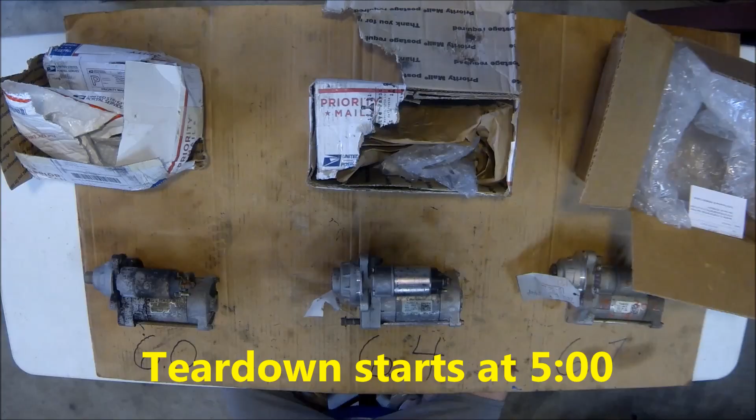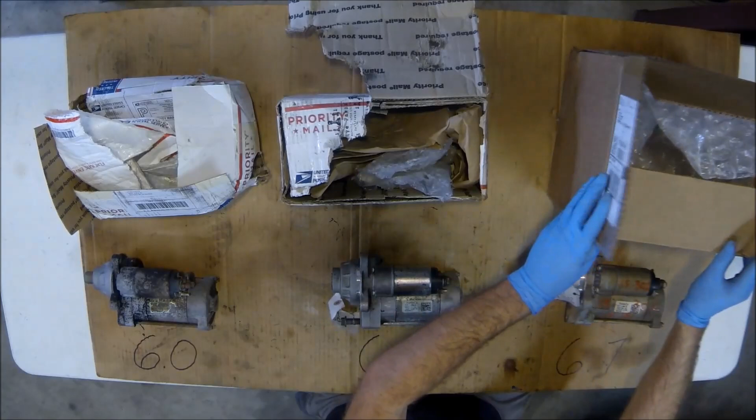So what we got here is three Ford starters: the 6 liter, 6.4, and 6.7, as denoted by the markings on my scrap piece of janky cardboard here. And a quick aside, here's a testament to the delivery systems. These two are USPS — this box was hanging on by a thread, this one wasn't much better but still structurally intact. This over here was UPS, and it looks almost brand new. So, you know, there's that.

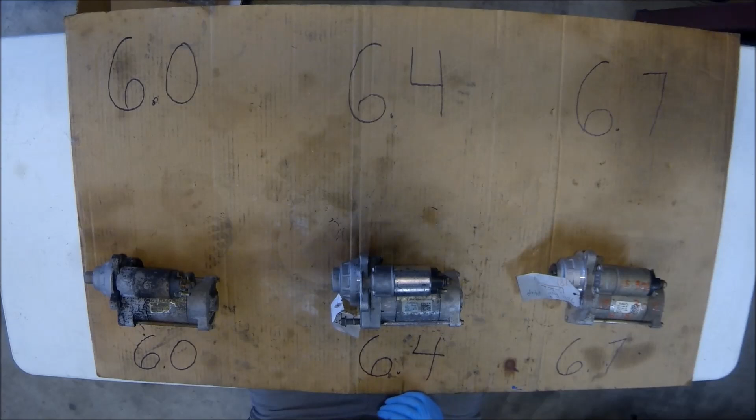If you go on the internet forums, you'll see a lot of people complain about the cranking RPMs of the 6 liter starter. So one of the popular swaps is to put a 6.4 starter on the 6 liter, and it cranks faster. After the 6.7s came out, it was discovered the 6.7 starters are backwards compatible as well. Even though they may look a little different as far as the nose cones go, the only thing you have to modify if you use the 2011, the 6.7 liter starter, is this threaded hole — it's smaller for a smaller bolt, while the 6.4 uses a larger bolt. So if you're going backwards, you need to put a bushing in to take up the extra room left over when a smaller bolt is used, which is required on the 6.7 liter starter. Anyway, the irony is I don't even own any of these engines.

I have a 7.3 liter engine, and I'm real particular about the way it cranks up. Try as I may, I've never been able to consistently find a starter that spins the engine in a way I'd consider healthy sounding. I've bought cheap starters, I don't know, this was 7-8 years ago, they were like $60 or $70 a piece. When brand new they'd spin the engine fast repeatedly, but they seemed to slow down quickly, if they held together at all. I think I went through 2 or 3 of them in a couple weeks because the quality was crap — it was solenoid issues mostly.

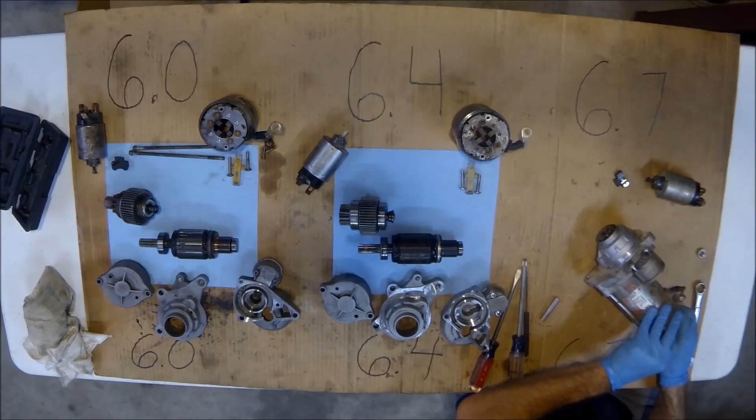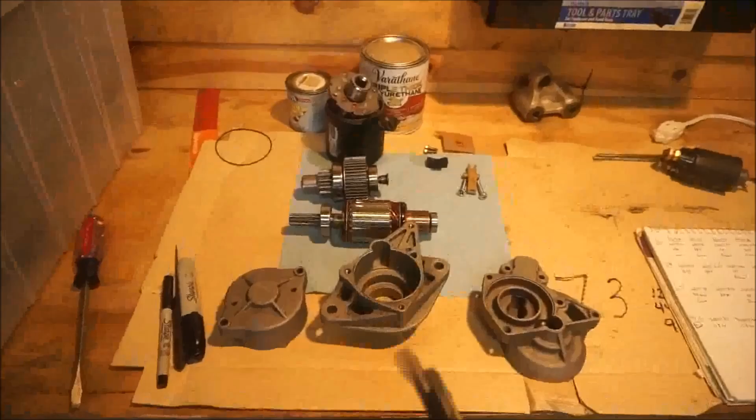Okay, so I've torn everything down, I've made all my inspections. I've got a 6 liter, 6.4, 6.7, and then over here we have a 7.3 starter. This starter is actually an AutoZone reman, so it's not like for like in the respect that these other 3 units are all OEM.

However, aside from that, I think we still can learn a lot from this comparison. So here's the findings. So this is a 6 liter starter.

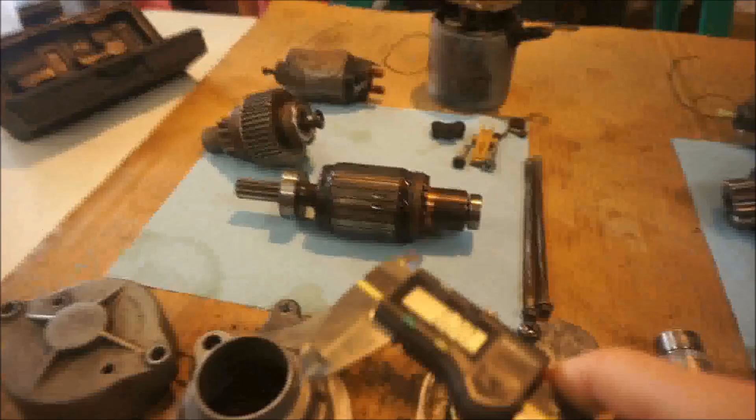Now the 2 obvious things that stand out to me are that the bearing that rides on the back of the starter drive, which is this bearing here that I'm pointing to, and it lives in this part of the housing, the bearing is the same size on the 6 liter and the 7.3. However, they are smaller than the corresponding bearings on the 6.4 and the 6.7 starter. So somewhere between the 6 liter and the 6.4 they decided to upgrade this, so the bearing is bigger.

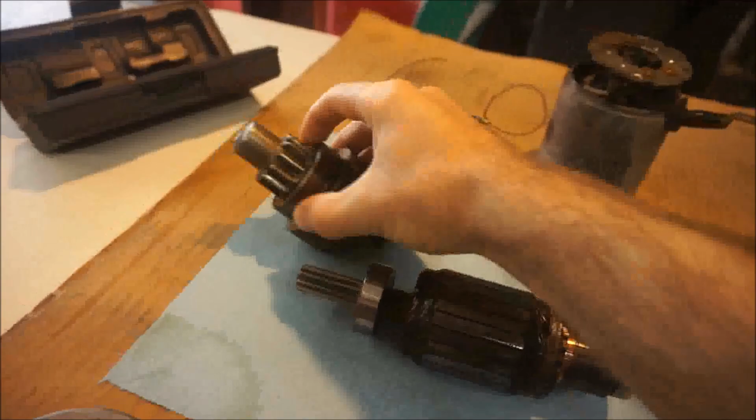The second difference is the starter drive itself. You can see the 6 liter starter drive has this little piece that sticks out past the gear, whereas the 6.4 and the 6.7 don't have that.

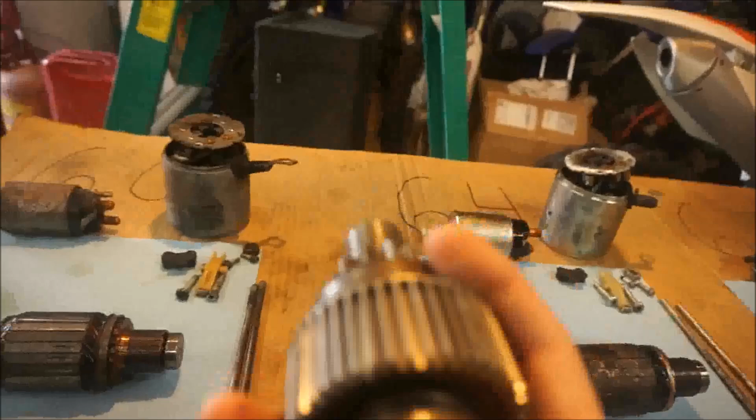Another difference is the way they actually operate. So this is the 7.3. If I push down here where the solenoid activates on the pinion here, when you push it up, as you can see, the tooth spins, or the teeth spin, but the shaft that they ride on is stationary. So when I push up, I'm basically only moving this portion outwards.

However, on the 6.4 and 6.7 starters, if I do the same thing, you can see the teeth move as well as the shaft. So functionally it's a different operation, but it performs the same function. So that's just a difference. It's not good or bad, it is what it is.

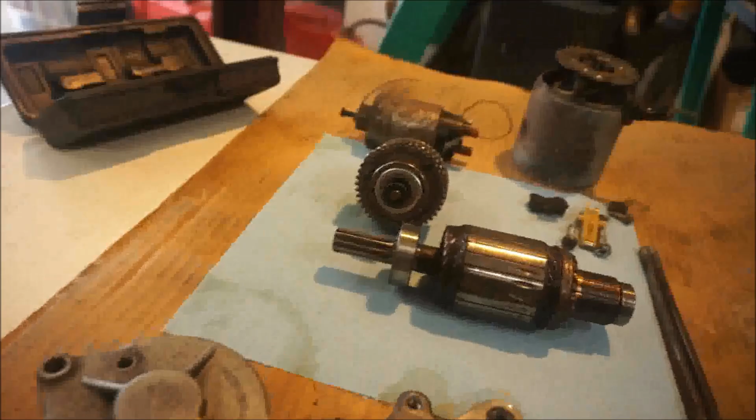Starter drive is different. This starter drive has a larger bearing here. Let's see, this bearing, which is for S&Gs, 40 millimeter OD. This one here, 47. It's a little bit bigger.

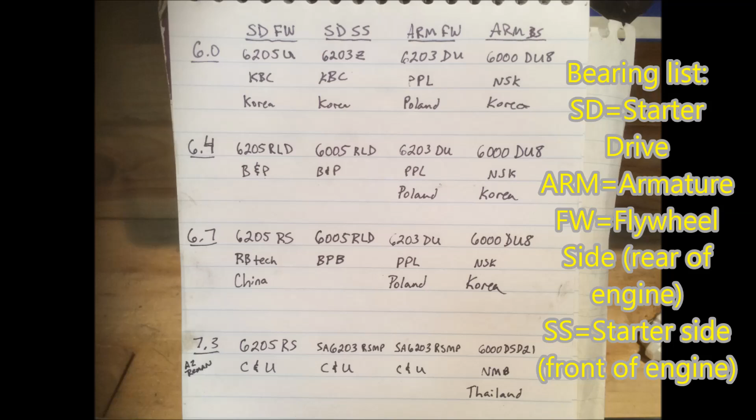Okay, now aside from that, other differences. The overall length of the armatures are the same amongst all the starters. However, the... I don't even know what you call them. In the case it would be called the field windings, but this portion here, the poles, I guess, for lack of a better term. Okay, these are roughly 47 millimeters, give or take, in length.

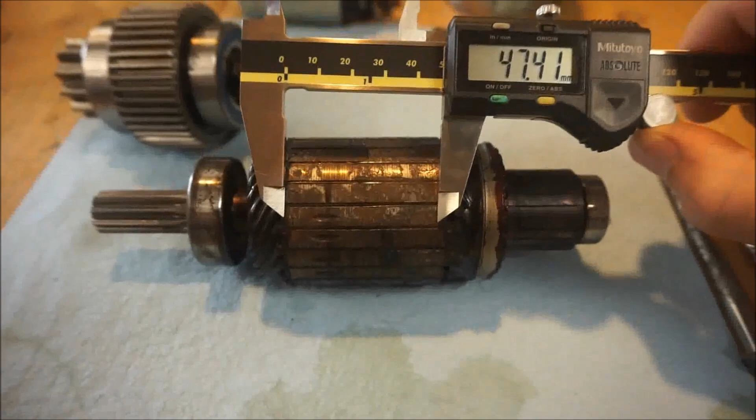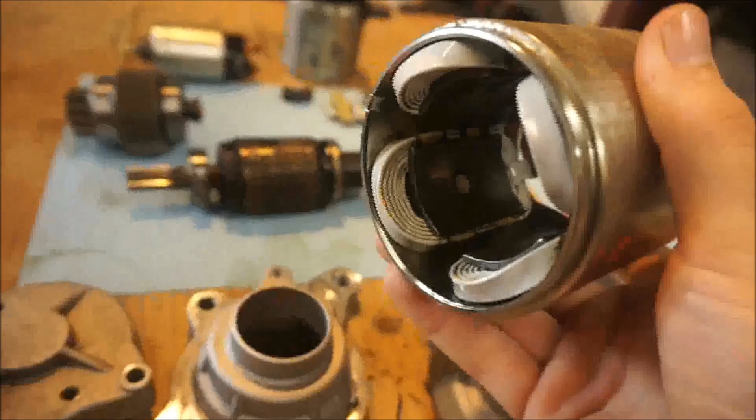On the 6.4, they're larger. And I'll show you on the 6.7 because it's cleaner, it's easier to see. So they are 50 millimeters compared to... you can see it's a pretty big difference. That's probably about 45. So they're 5 millimeters longer on the 6.4 and the 6.7, and the corresponding field windings, the poles, the magnets are larger too, to correspond with that increase in length.

So that is really the only difference, aside from little things like the solenoid of the 6.4 and the 6.7 have these little black plastic plugs of some sort. The solenoid on the 6.0 and the 7.3 do not have that.

So really the difference is the length of the field windings and this corresponding section on the armature. So any increase in power or cranking RPM or anything like that has to come from the bigger windings and armature that's on the 6.4 and the 6.7, because the gear reduction is the same across all of them. They all have 12 teeth on the drive here, 44 teeth here, and the corresponding teeth count on the armature itself is 9, so the gear reduction is the same across the board. The brushes are about the same size. There's the same number of poles on all of these armatures.

23 is the number, in case you're wondering.

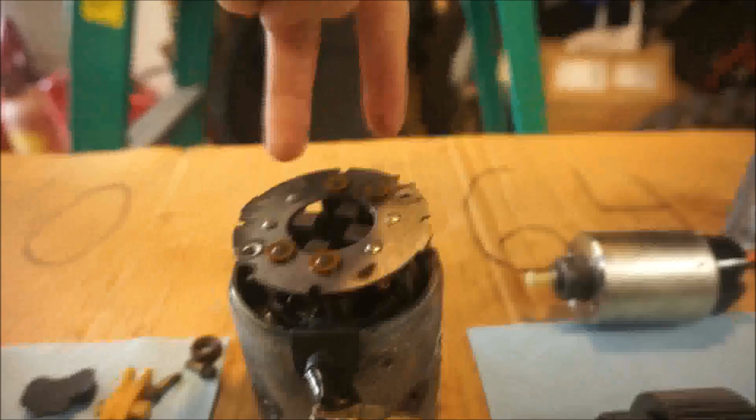The only other difference I saw is in the way this brush plate is attached. On the 6-liter starter, the brushes are attached to these two poles back here in the corner. So these two poles are where the brush is attached.

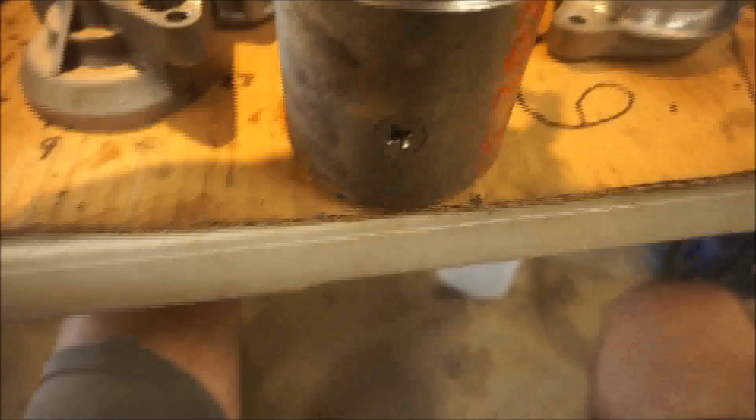It's different on the 6.4 and the 6.7. The brushes attach differently, the wiring looks completely different, and these are all series wound DC motors, because you get greater torque at 0 RPM with that style, so it's ideal for a starting motor. But if you can tell, these things are wired up differently.

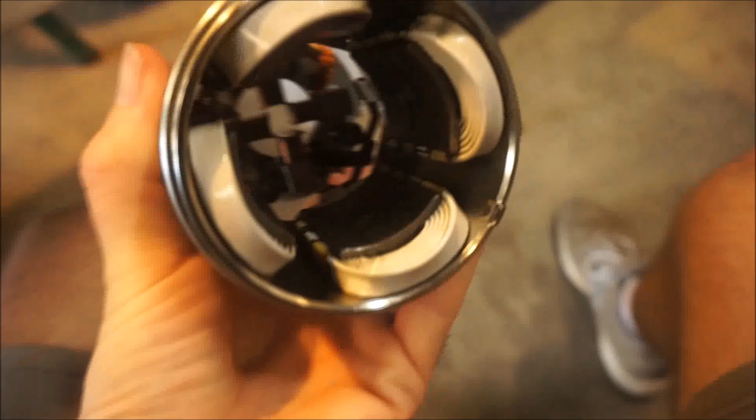I'm not sure how to describe the differences. Disclaimer, I ain't no electrologist, so I'm just kind of making some guesses here.

On the 6-liter, the field windings are connected at the bottom. There's two connections at the bottom, one there. So they're wired up differently. Now, I don't know if that matters. I think functionally, you know, on this one there are no connections at the bottom. Everything's connected up top.

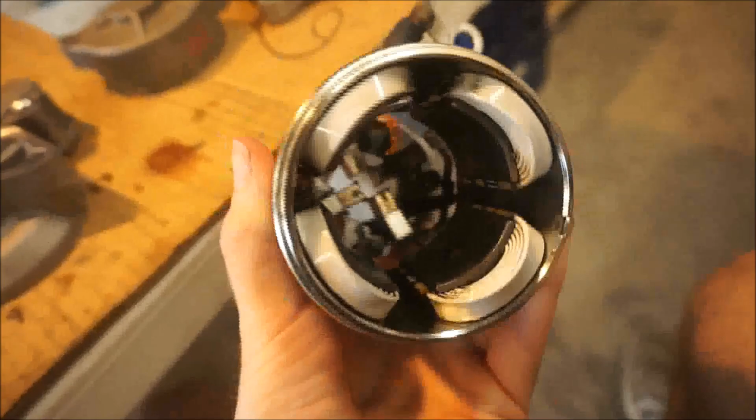So there is a difference. Now, whether or not that makes a hill of beans, I doubt it. It's probably just different ways to skin the same cat, if you will. There's the 7.3 — it's just like the 6-liter.

Okay, hopefully you can see this. So here's what we're dealing with. Up here we have the 6.4 and 6.7 liter starter. Down here we have the 6-liter and the 7.3 starter. And if you'll notice, they're wound differently.

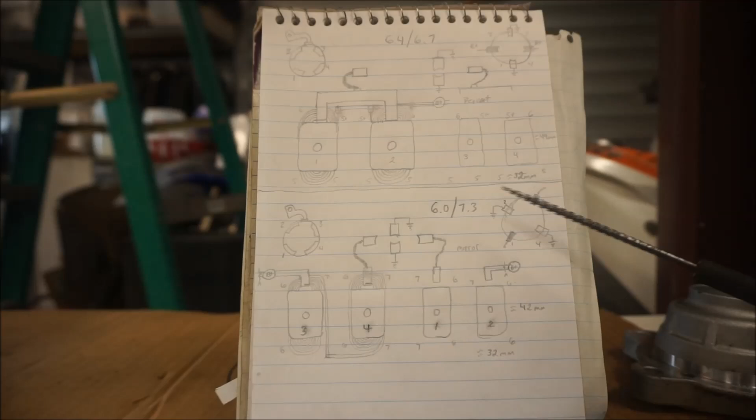Now, I alluded to this earlier. So let's go over the 6-liter first. These are your 4 brushes here, and 2 of the brushes go to ground. The other 2 have battery voltage, but since these are series wound motors, what happens is that the battery voltage...

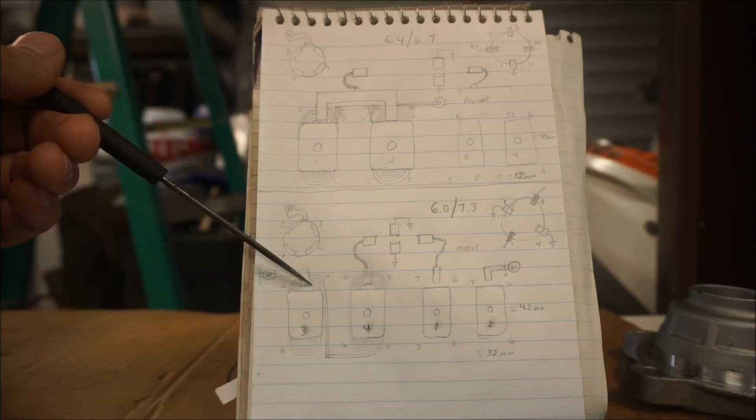first comes in through this post. This is the battery connection here, also shown there. So the voltage comes in, and there's a copper bus bar here, and it connects to the innermost wrap of these wire wraps that go around this. This is the electromagnet that's only magnetized when current is flowing through these wires.

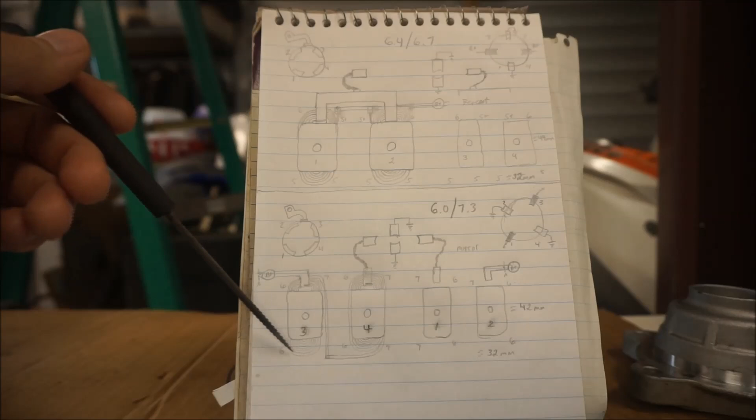These wires come in and wrap around, and they wrap around 6 times, and then at the end of their wrap they come down here, catch this wire, and come up here and wrap around this magnet 6 times, and then once they're done wrapping around this magnet, they come up and energize the brush here. And so that's 2 of these — that's 3 and 4.

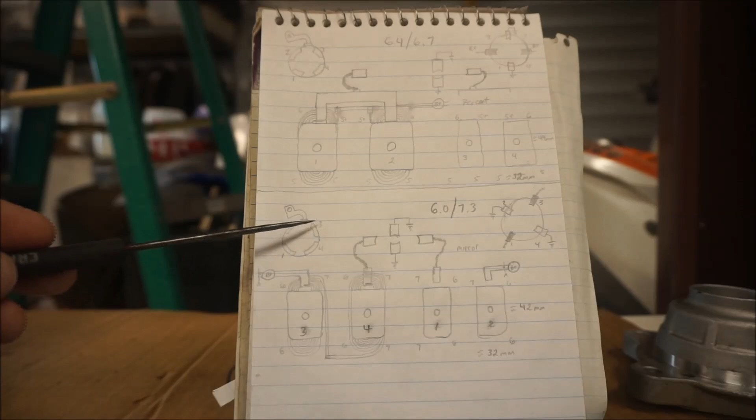So this is the top view of the starter. This is the battery connection here. It comes in — you got pole number 3, 4, 1, and 2. So these are 3, 4, 1, and 2. So that's one half of the equation.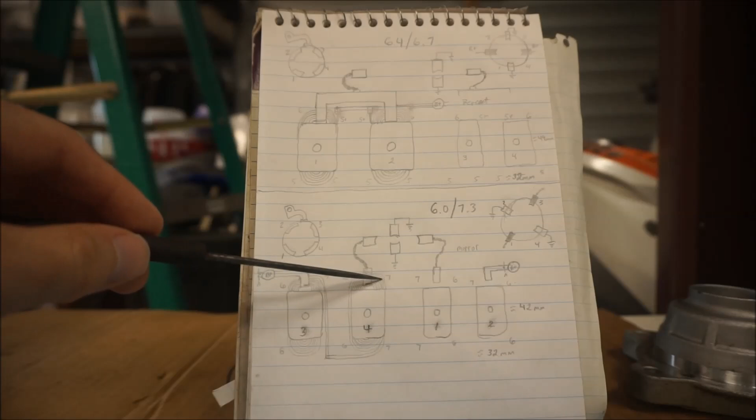The other half over here is actually mirrored. So you would take this on the left side and mirror it like that, so everything's in reverse. So where you've got technically 7 wires here, because there's an extra wire that wraps around and goes down, that's flip-flopped, and so there's more wraps on this side.

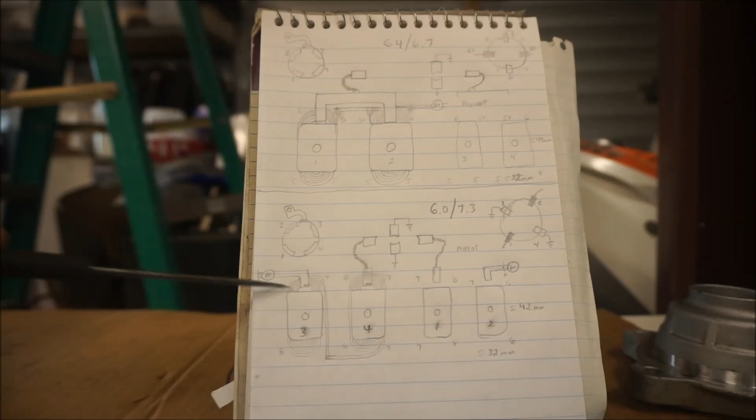So the wrappings would come here, and then they would go underneath and catch this pole over here and wrap around some more, and then this is the bus bar that goes back to the battery. So this is all connected right here.

So if you look up at the 6.4 and the 6.7 liter starter, you get the brush here, you get the 2 ground brushes, and then you've got your battery positive post here, and that comes across. There's a copper bus bar as well. It comes behind here and stops. And both of these poles are wound in the same way, and they're both parallel to this bus bar.

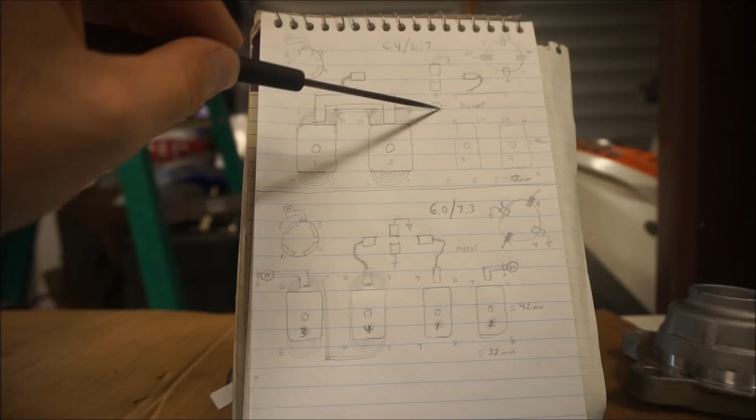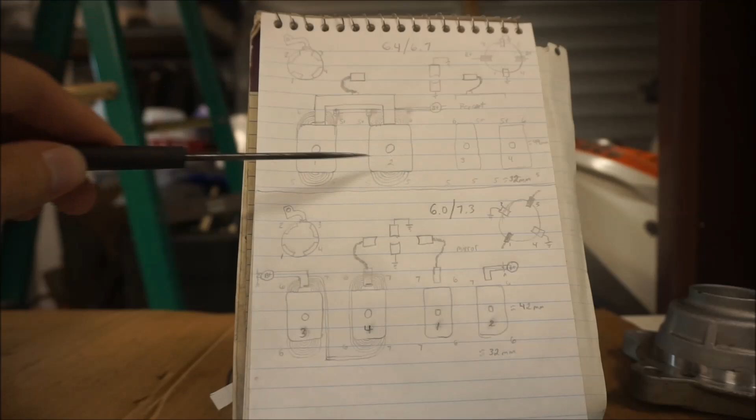So when this bus bar is energized, battery voltage goes to this series of windings and this series of windings at the same time. And they are wound 5 times versus the 6 times down in the 6-liter and 7.3 starter.

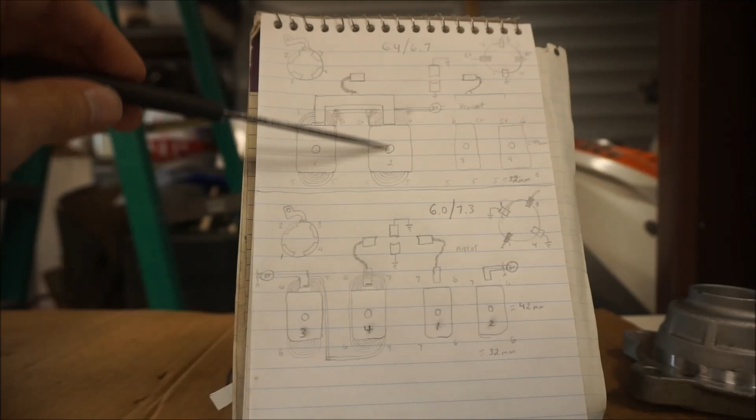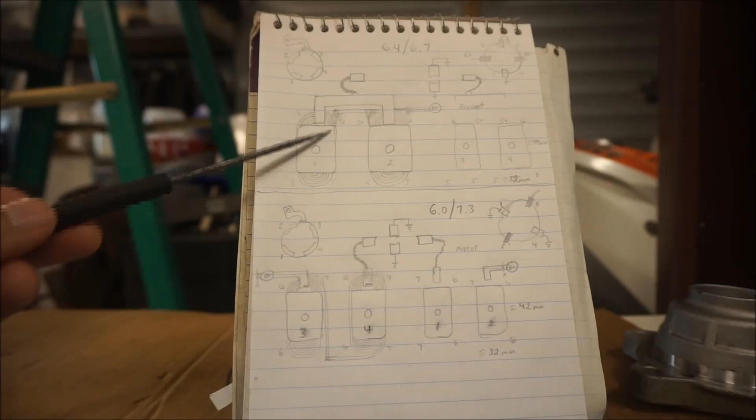But these poles are bigger. These poles are 49 millimeters top to bottom, whereas the 6 liter and the 7.3 are 42 millimeters. So these poles are bigger. Even though there's less wraps of wire around them, they're bigger poles, so I didn't do the measurements - I don't know which one technically has more wire, lengthwise speaking. But over here, that serves pole 1 and 2. If you come to the other side, pole 3 and 4 are repeats of this - they're not mirrored, they just repeat.

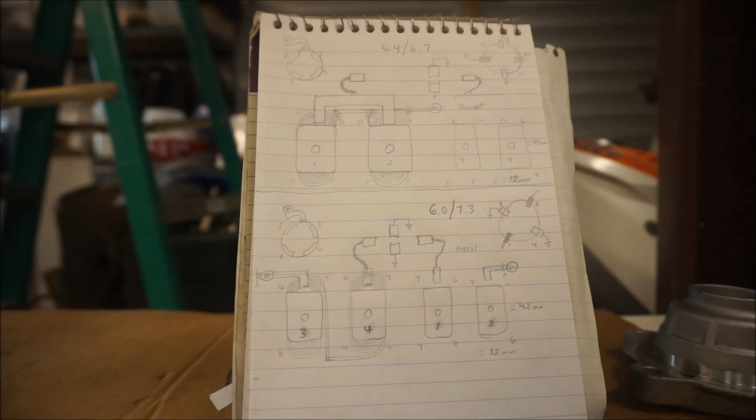So my theory as to why the 6.4 and 6.7 liter starters spin over much quicker is for a few different reasons. One, the poles themselves are bigger, as well as the windings on the armature.

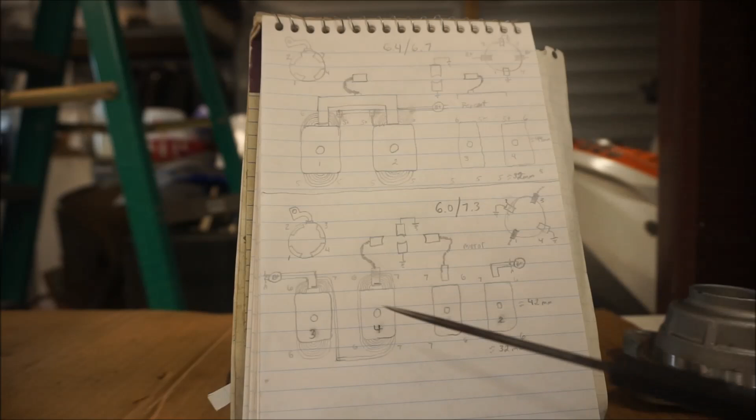Which would be these right here - they're bigger to compensate for the bigger poles. But aside from that, the fact that they're wound differently, the electricity has to come in here and go all the way around this pole, then it goes to this pole, wraps all the way around again, and finally it goes to the brushes.

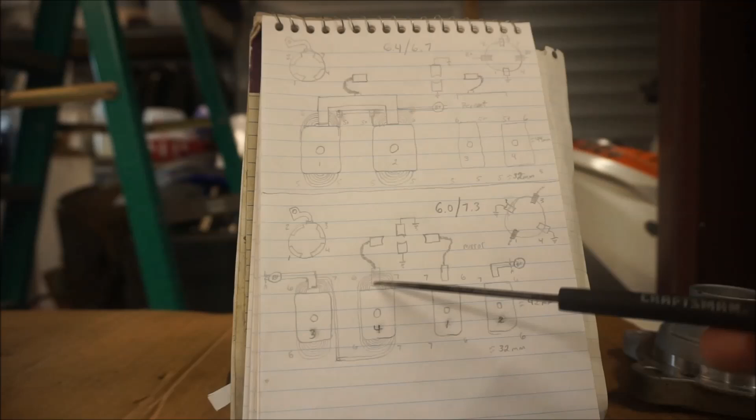Now, we're speaking only in milliseconds, but it does take longer for that energy to come in and make all these wraps, then come to the next one and make all these wraps before it gets to the brush. Whereas in the 6.4 and 6.7 liter starter, it comes in the bus bar, hits these wraps, and it's wrapping around here at the same time it's wrapping around here, then shoots up the middle, connects to this bus bar, goes to this brush. So it's going to be quicker. In my opinion, that's why the motor spins faster.

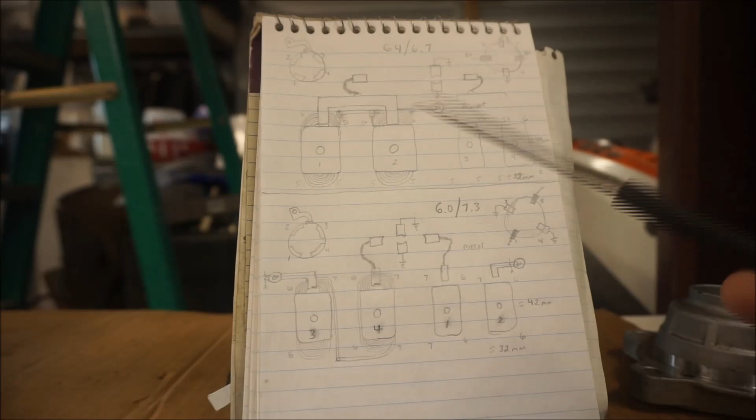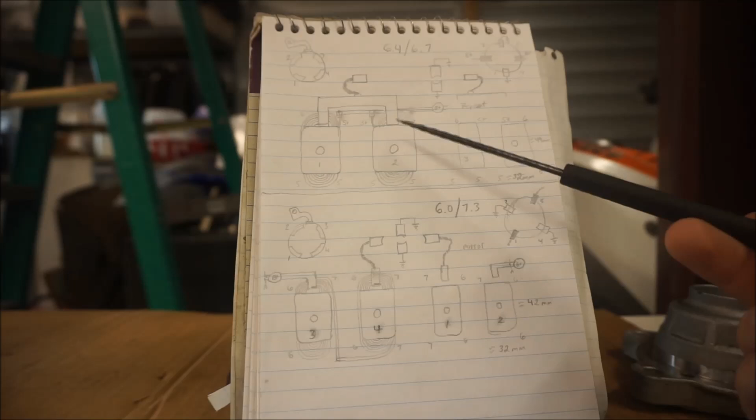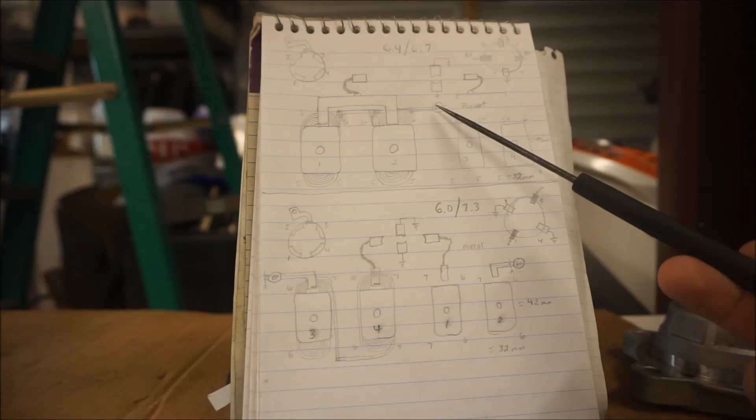I don't know what you'd call the difference between these two, because they're both series wound, but it's almost like this is a series wound motor, yet the poles are wired in parallel, if you will. Whereas on this one, it's like a series motor because it's in series - it goes from here to here to here. Whereas up here, it just goes here, these at the same time wired in parallel, then up to this brush. So that's a little different, and the locations of these poles in the motors too. I've got them numbered the same, but as you can see, their locations are wired differently.

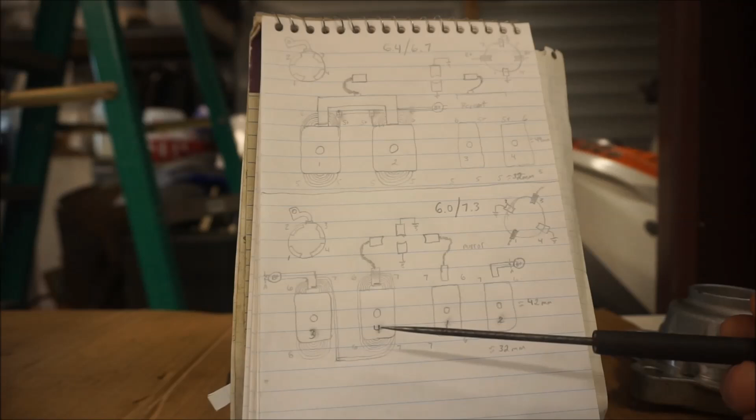Yeah, so that's about as deep as I can go on these starters, and certainly deeper than I've ever seen anybody else go or seen a video of. This is something I've wanted to know for a long time. Now I know. There's been a lot of speculation on forums as to what the differences really are, and people make a lot of guesses, but they don't really know.

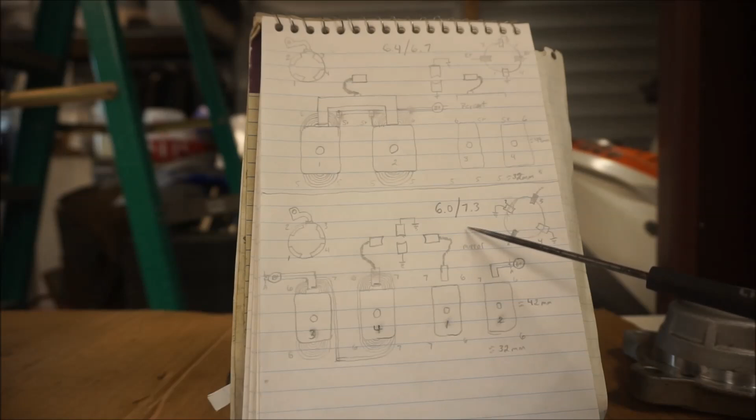There's even one forum where someone at a parts store printed out the data sheet that comes with these starters - I guess from other suppliers, you don't really get them from Ford. On the data sheet, I'm not looking at it now so I can't remember exactly what it said, but I think it said something like the 6 liter and 7.3 starters actually were more powerful but spun slower. I'd take that with a grain of salt, because those data sheets oftentimes are just the exact same data, just printed out and thrown in a box to make it look official.

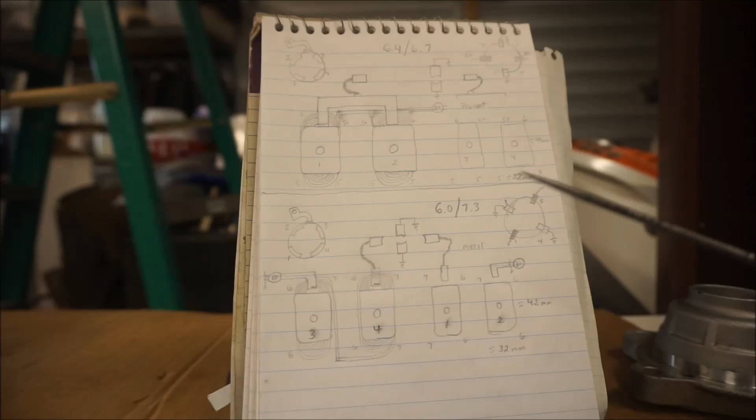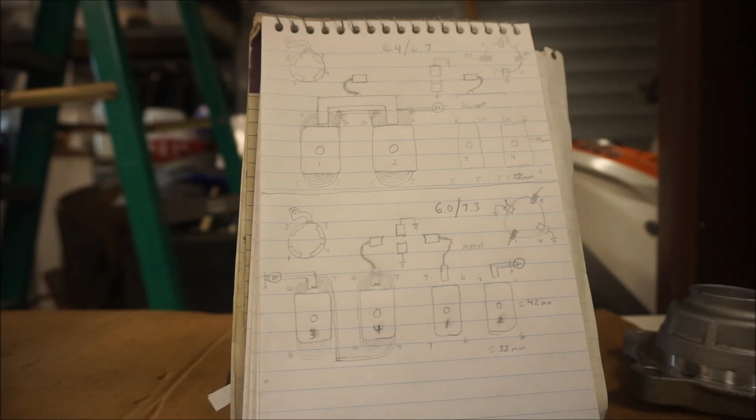And B, they may not have used - it may have been 2 different companies doing the testing. They may have used different methods of testing, because when you test a series wound motor, it needs to be tested against a load, and I don't know, there's a lot more to it than I even understand. But those data sheets, whatever - the proof is in the pudding, as I've stated earlier, and clearly the 6.4 and 6.7 starters are more powerful and spin the motor over much, much faster.

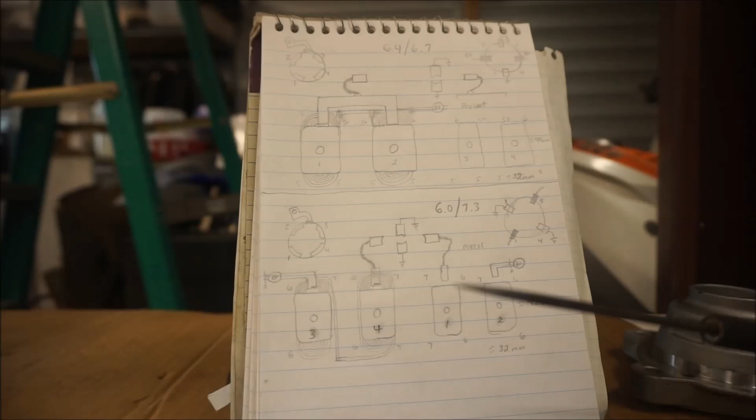So there you have it. Gear reductions are the same - it's just the motor itself that's more powerful. There's where your extra RPM comes from.

Okay, just for clarity, now I misspoke in the video a lot, and I don't feel like reshooting it, so I just want to say this: these are field coils.

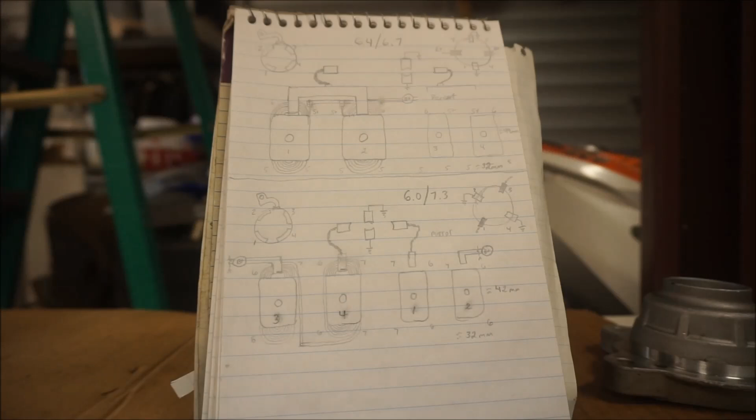So anytime I say poles, I'm really talking about the field coils. And poles may be an appropriate term as well, I don't know. As I said, I'm no rocket surgeon, don't have a degree in electrology, but I get by. The width of the field coils are identical at 32 millimeters.

Only the lengths are different, that is all. The only other thing I didn't check was the actual wire size of the windings between the 6 liter and the 6.4. They're potted, so it's really hard to get a measurement. Let's see what I can get here.

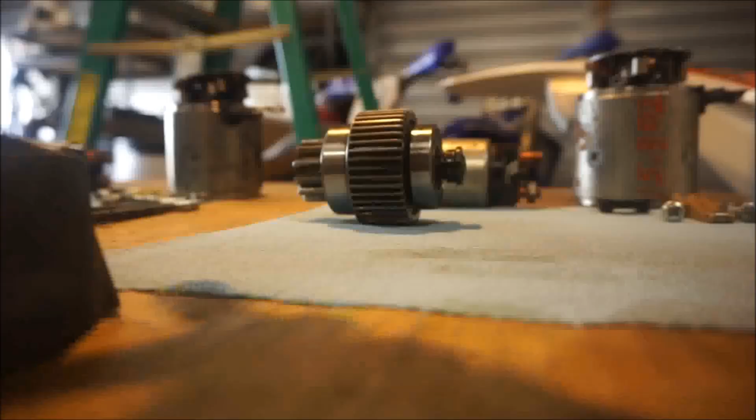Two and a half, roughly. I'm going to say 3 millimeters for the 6.7. Yeah, 3 millimeters for the 6.4. The 6 liter is really hard to measure. I'm going to say 3 for the 6 liter too. So it looks like all the winding, the wire size, and the armatures are all the same.

Yeah, they're all the same, so that's no difference. So there you have it: the definitive difference amongst all the Ford starters.

For the diesel, anyways. So just to wrap things up, the only performance increase that people are seeing when they install a 6.4 or 6.7 starter on their 6.0 is one of two things. Either it's due to the bigger armature and field windings, which I would presume that it is. I would assume, well, it stands to reason that that would be a more powerful motor. There would be more electricity flowing, generating a larger magnetic field, so more flux, and it would just have more power.

Aside from that, the only other reason they're getting more cranking RPM and a better performing starter is just the fact that it's a newer starter that they're putting on an older engine, newer than the starter that they're replacing. Aside from that, there's no difference.

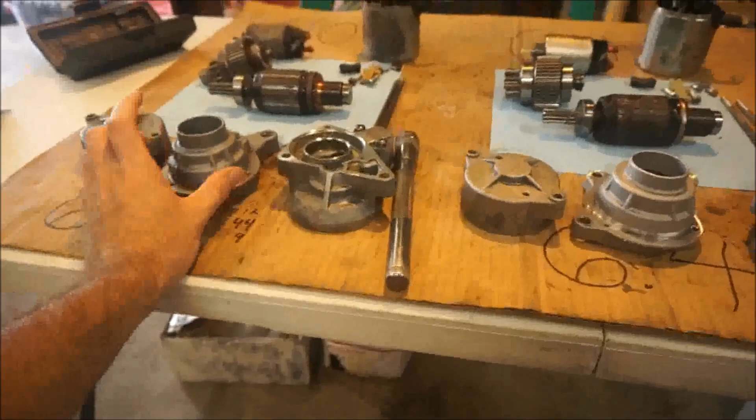Everything's the same. Now, one more thing that I do want to mention, that it's pretty cool, is that aside from the nose cone that actually bolts up to your engine, so it would bolt to the flywheel housing, aside from this, all the other parts are interchangeable.

Now you'd want to keep the armature with the proper field windings, yeah, that you need to keep the same, but aside from that, well, and you'd have to keep in mind the different sizes of the bearings between the 6 liter here and the 6.4 here. But aside from that, take all that into consideration.

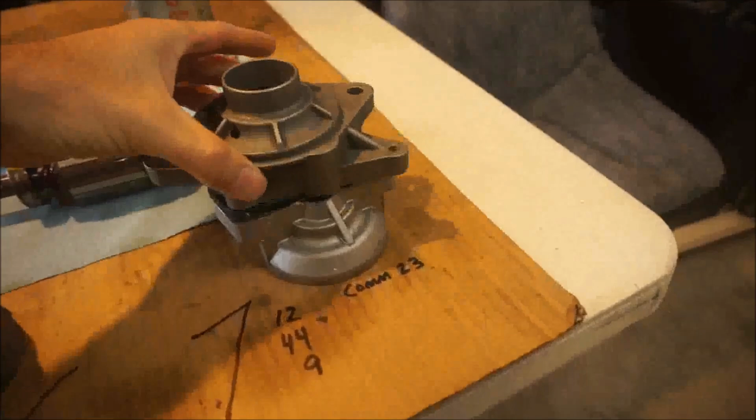So you can take a 6.7 liter starter, remove the very end of the nose cone, take your 7.3 nose cone, boom. 6.7 liter starter mounted to a 7.3 liter engine.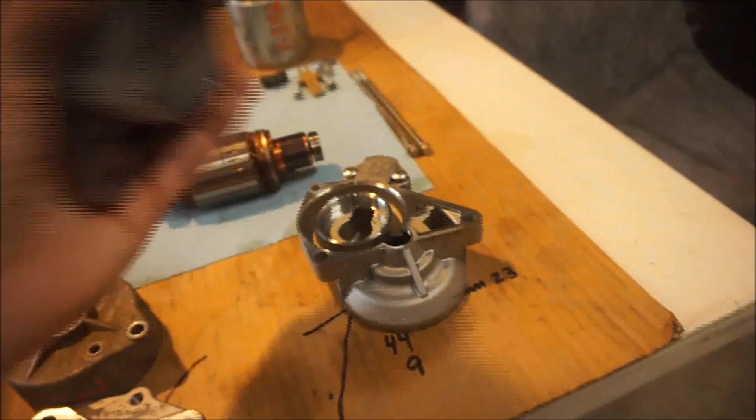So you'll get the bigger armature and field windings, the more powerful starter, and you're good to go. And you'll also get a larger bearing here, so it could last a little bit longer.

So now I'm going to build a super starter out of this good 6.7 liter starter and the nose cone on the 7.3. Well, they say the proof is in the pudding, so here's the pudding. We'll do the eating later.

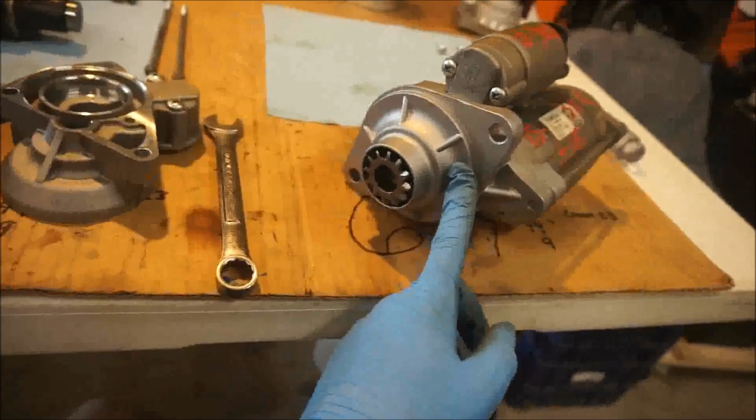This is the 6.7 liter starter mated to the 7.3 liter SAE2, I believe, mounting flange. So we'll give this a shot, see how it goes. It's time to eat that pudding. I pulled out my DP tuner so it won't start, it'll just spin over. So let's see how it sounds.

Joshy likey, I'm for it. Love the way that sounds.

Okay, this test is with the Boostotron hooked up. That is my auxiliary wire that goes from the passenger side battery connection down to the starter.